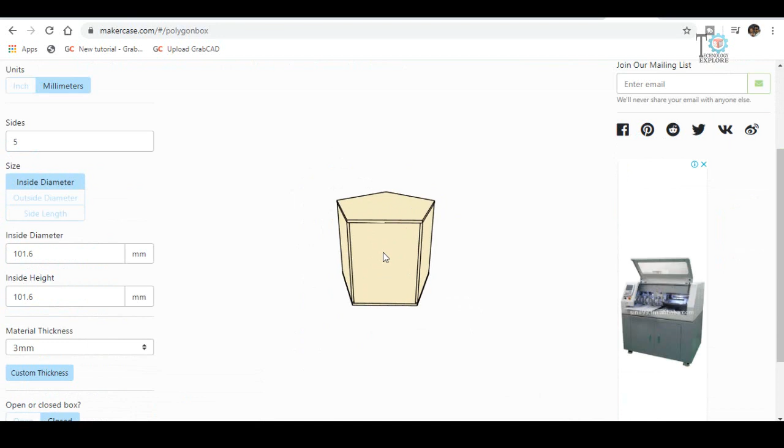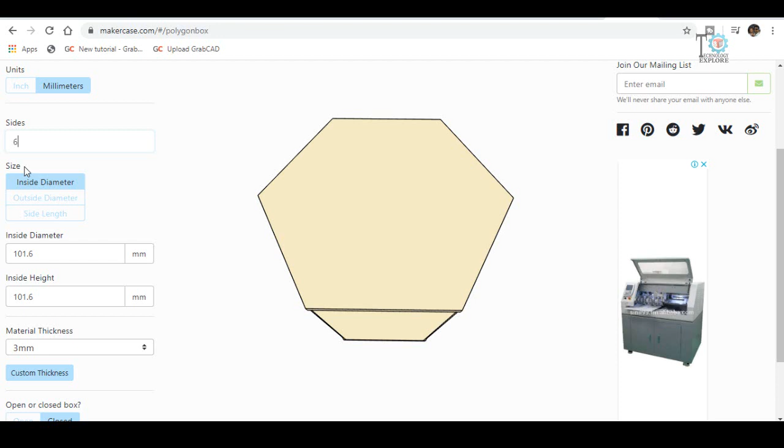After selecting the units, you have to select the sides. So let's say instead of 5, if I select 6, it will automatically convert it into a 6-sided box. Then this is the size reference.

When you put the sizes here on these boxes, the reference points are inside diameter, outside diameter, or side length. So select your desired reference type. Here is the inside diameter - let's say I select 200 millimeter diameter, and inside height - let's say 50 millimeter. Here is the material thickness: acrylic sheet or plywood sheet thickness 3, 6, 9 or 12. You can also select custom thickness by choosing this option, typing 5 mm, and pressing OK.

Next we have this option, open or closed box. It depends on you what type of box you are going to select, open or closed.

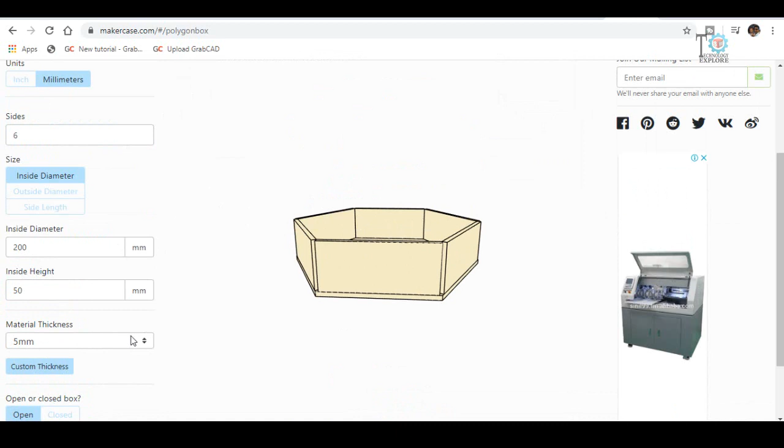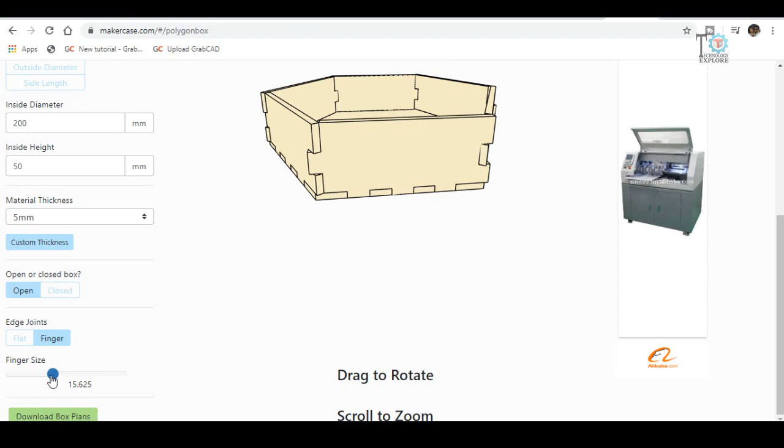Then we have this option, edge joint. Here you can see these are flat lines, but you can also use finger joints like this. And then we have the finger size here - when you increase the size, the number of fingers automatically varies according to the design.

Once you have done all the design, you can download the files. For that, here you can see this button, download box plans - so click on it.

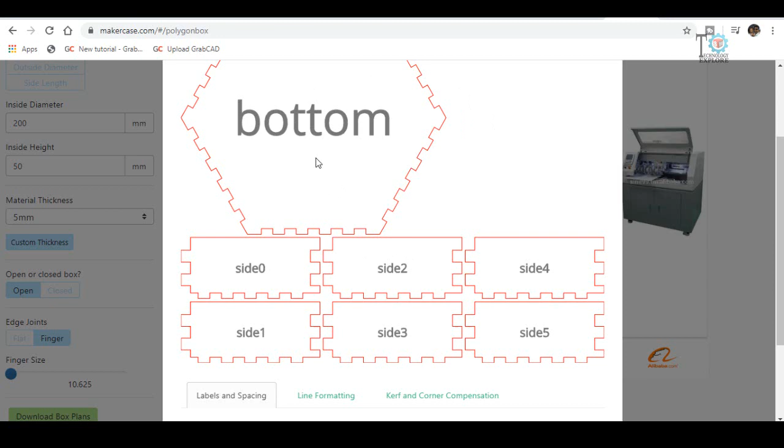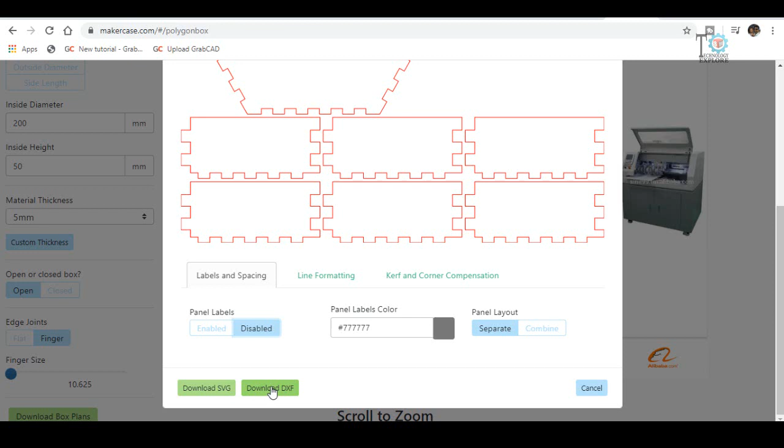Here you can see these are the box plans, and the panel labels. If you want to hide them, select this option, disable panel labels. Then we have these two options to download the files - it depends upon the software for your CNC laser cutting machine. Mine is DXF, so I'm going to download the DXF files for all these plans.

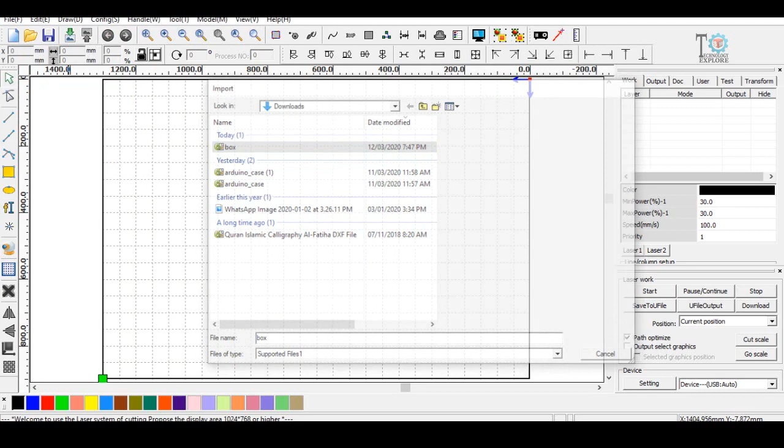Download has been completed, and now let me show you by importing this DXF file into my CNC laser cutting software. Let me import - and here is the box, open. So here you can see.

I hope you have enjoyed and learned from this video.